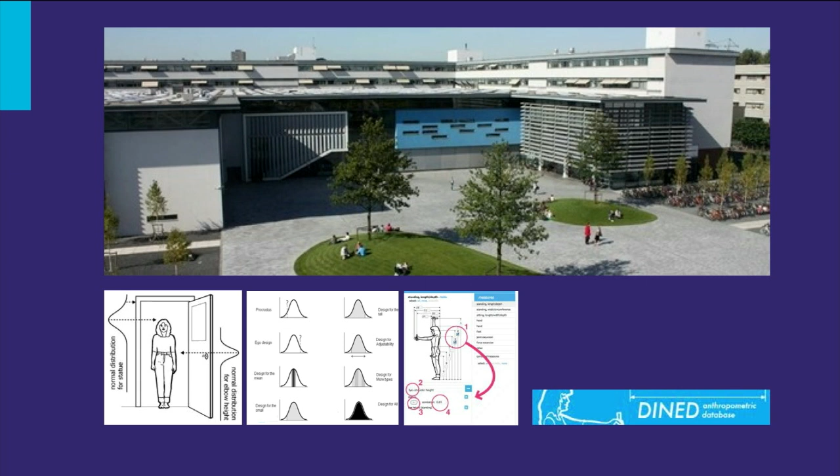To design this cockpit, the students deployed their knowledge of ergonomics, taught in the ergonomics course of the Faculty of Industrial Design Engineering in TU Delft. If you want to design an optimally comfortable cockpit for the driver, there is a lot you can look at. Most importantly, the driver needs to fit inside the car, so the dimensions of the cockpit must match the driver. In this movie, we focus on the cockpit dimensions. How do you design a well-dimensioned cockpit?

Like all good design projects, the 2012 DUT racing team started with an analysis of the situation. They looked at what the driver does, which parts of the car are involved in these actions, and what boundary conditions need to be taken into account. Because they are developing a next generation car, they asked the previous drivers for their experiences with the cars and for their recommendations for improvement.

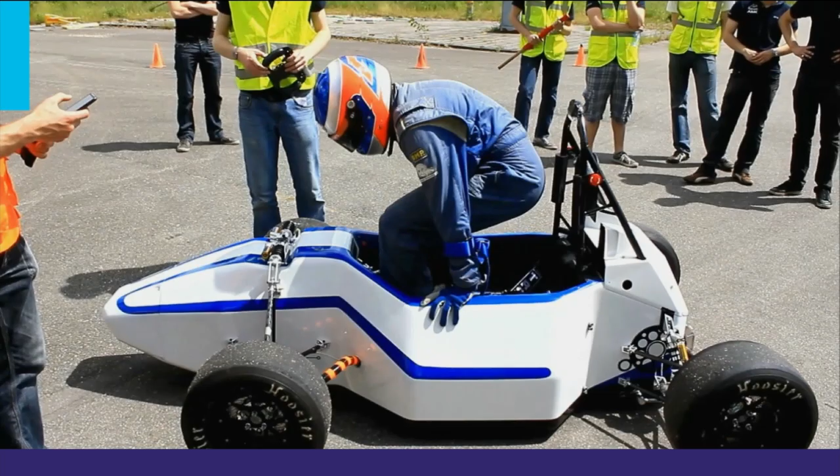Let's take a closer look at the actions of the driver. First of all, he has to get inside the car, and at some point, he has to get out of the car. So the entrance of the cockpit needs to be wide enough to allow the driver to get in and out of the car easily.

Once in the car, he has to drive, which means he has to sit in the seat with his feet on the pedals and his knees underneath the front hoop, his hands on the steering wheel, and his head underneath the main hoop and against the head restraint. The driver needs enough space to turn the steering wheel and to see clearly where he is going.

The DUT racing car is designed for the design competition Formula Student. This competition has a lot of requirements for the car. The important requirements for the design of the cockpit are: a P95 driver should fit inside the cockpit.

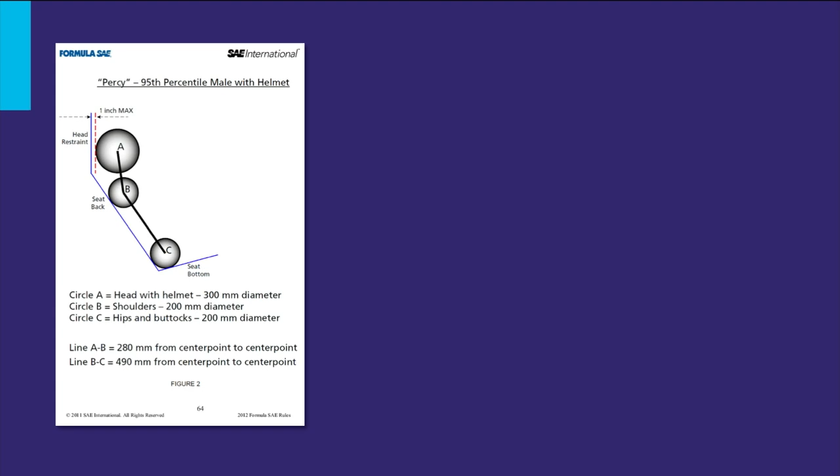There are lines between the main hoop and the cockpit that show the required clearance. There are templates for several parts of the car that show the minimum required clearance. When put together in a 3D picture, this shows the minimum required space inside the cockpit.

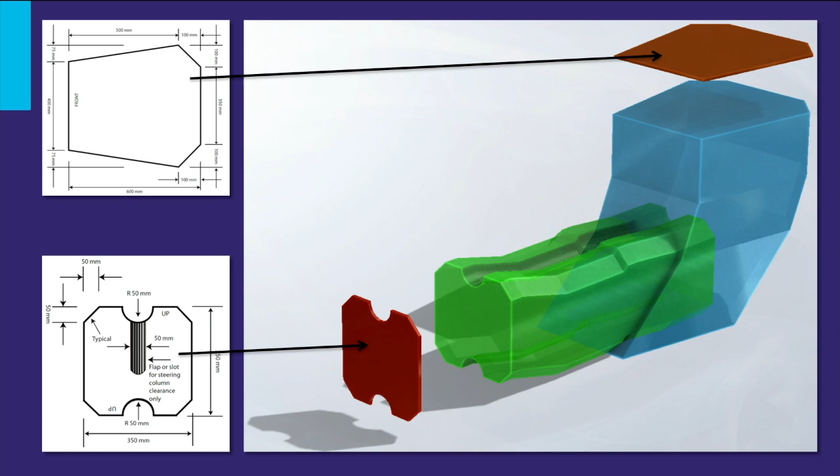For safety reasons, the driver should be able to get out of the cockpit of the car within 5 seconds. Not only must the entrance of the cockpit be large enough, but also the space underneath the front hoop should allow the driver to get his legs out fast enough.

It is not only the Formula Student competition that sets boundary conditions. The team may well develop some additional requirements. The 2012 team decided that they wanted to keep the center of gravity as low as possible in order to improve

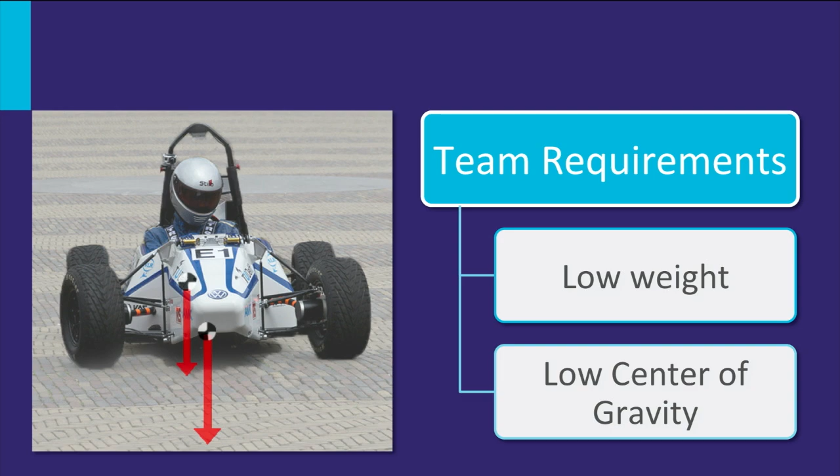the stability of the car. And they decided to fix the position of the pedals, steering wheel, as well as the seat. The drivers of the previous cars are a useful source of information about comfort.

8 of these drivers filled in a questionnaire. It is vital to make sure that all drivers have excellent visibility. Supporting the driver's upper legs, thighs and posterior is important for comfort.

You should be aware that the pivot point of the heel is not where it contacts the ground. The transfer of the dimensions of the mock-up to the digital drawings should be done carefully. And the driver's clothes limit movements, so take this into account when designing the available space.

To summarize the analysis phase: you know that the driver sits in the car and has to be able to reach the pedals and steering wheel. He also needs to be able to see where he is going. You also know what boundary conditions are set by the competition and the team, and you know what drivers would like to see

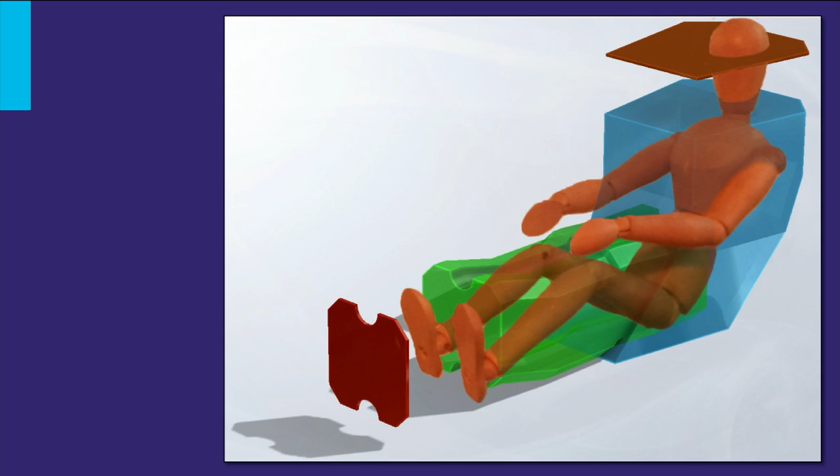improved. The next step in the process is to collect dimensional data from the drivers. From the analysis phase, you know which dimensions of the drivers you need to measure, and that you have to find out more about the comfortable range of motions of the driver's joints.

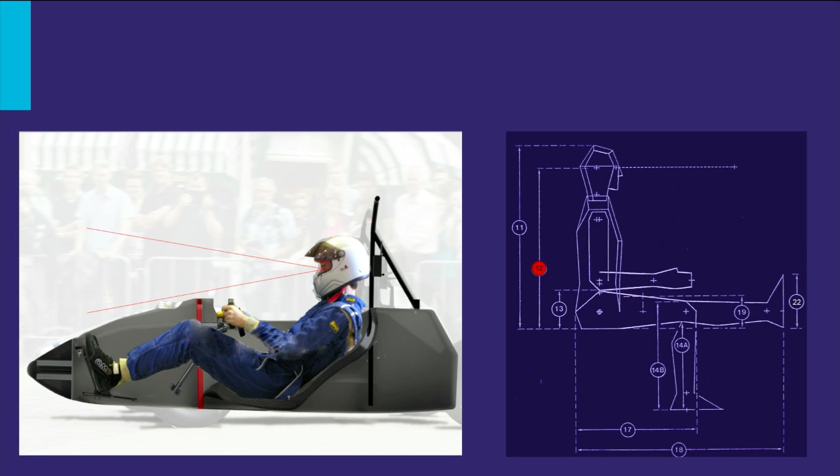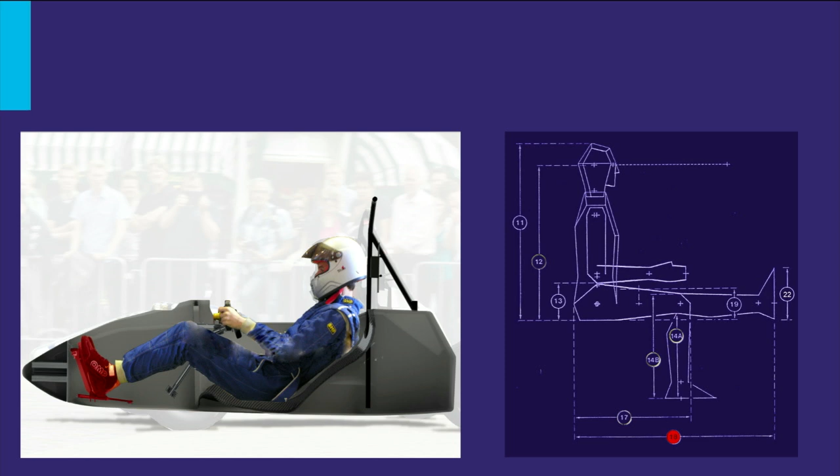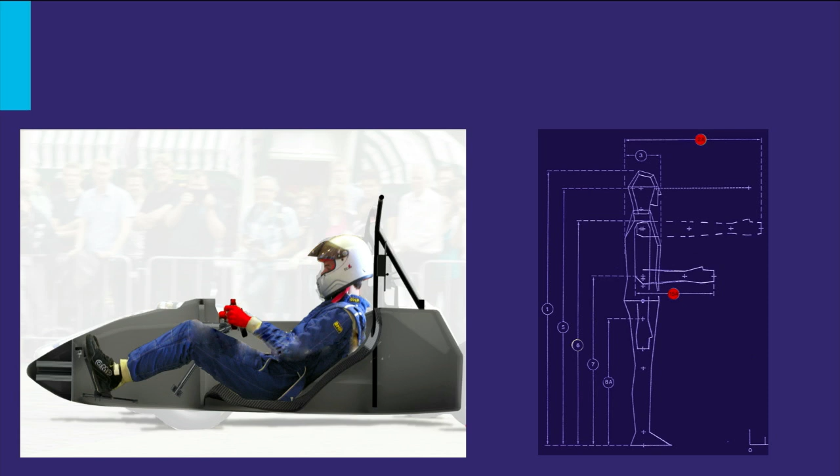The dimensions of the driver that determine the dimensions of the car are: the eye height when seated, for the driver view; the length of the torso for seat height; the length of the legs for the distance between seat and pedals; the length of the upper and lower leg for the clearance needed to get in and out of the car; the length of the arms for the position of the steering wheel; the width of the hips for the width of the seat; and the width of the shoulders and across the elbows for the width of the cockpit.

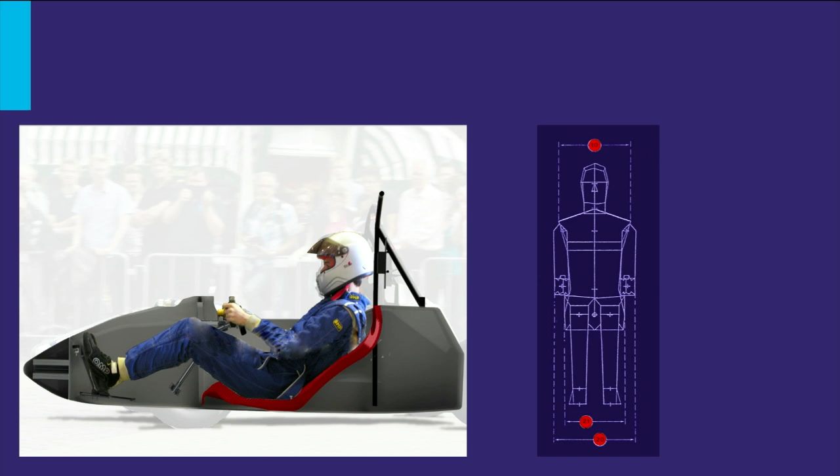So now you've got a list of all dimensions that you need to measure from your team of drivers. But as they will be dressed in their racing clothing, you need to measure them dressed in this outfit.

Now you know what the dimensions of your drivers are, but will a 95th percentile stature driver fit? You may look up the dimensions of this driver in the DINED tables, but you do not know how much extra you need to add because of the racing clothing.

A way to solve this problem is to measure drivers with and without their racing clothing. This gives you an estimation of how much you need to add to the DINED data.

When a driver sits in the car, not only the dimensions of the body are important, but also the posture. This means you will have to look for information about the comfortable ranges of motion of the joints.

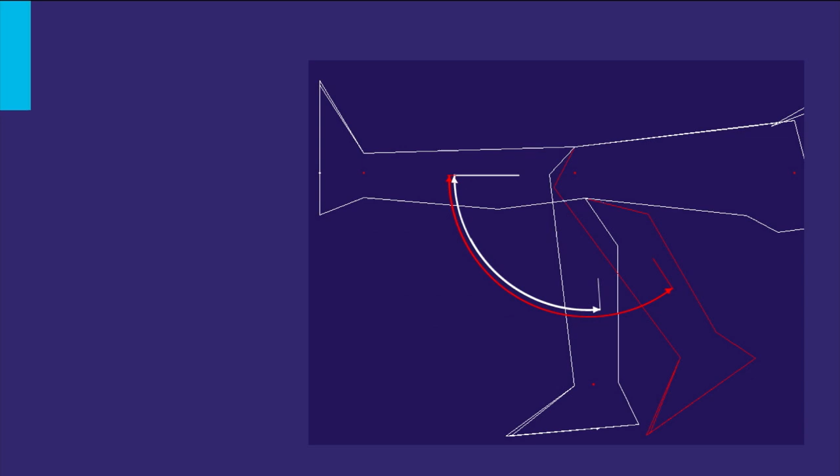For the legs, you need information about the ankle, knee, and hip. For the head, you need to know the comfortable position of the line of sight and the comfortable range of motion of the neck. For the arms, you need to know the comfortable ranges of motion of the shoulder and the elbow.

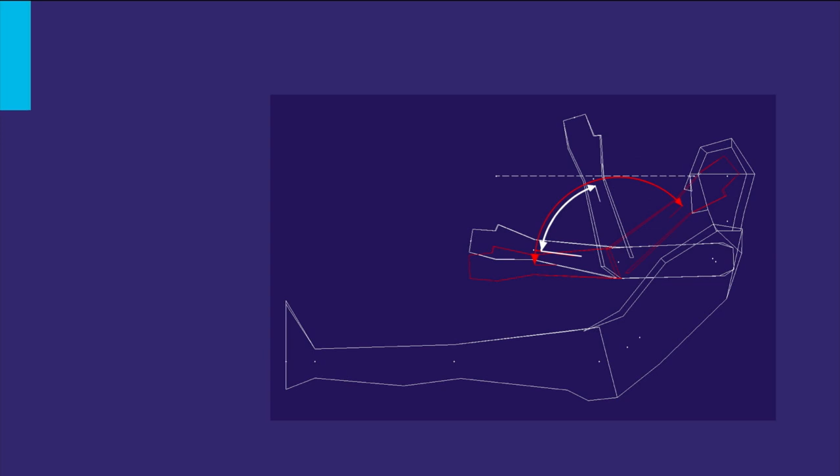After you have gathered the necessary information, it's time to start developing concepts. This is not a linear process, but a cyclical one. Each decision made for the position of a part of the car will influence the position of the other parts. The goal of the concept development process is to find the optimum position and dimensions of all parts of the cockpit. A starting point for the concept phase is the decision that all elements in the cockpit should get a fixed position: one size fits all.

To find out where to put these elements, there are three possible approaches. You could start from a fixed position of the eyes, the so-called eye reference point. You could fix the feet, called the feet reference point. Or you could go for a fixed position of the hip. This hip reference point is what we will use here.

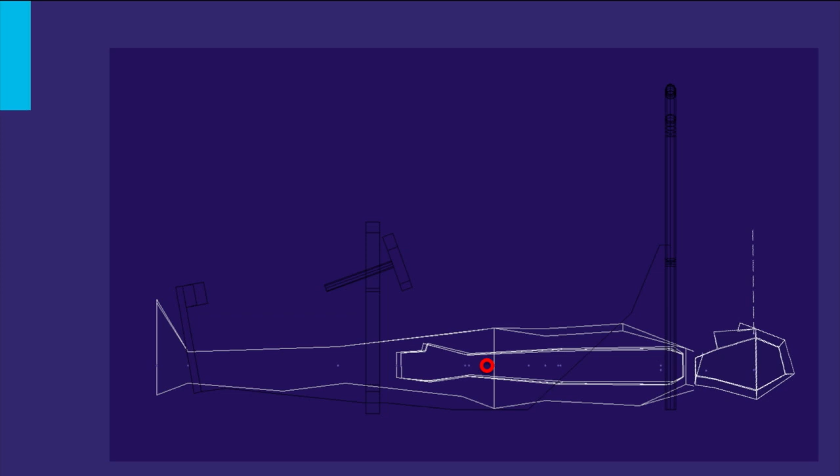The team made the decision that the center of gravity of the driver should be as low as possible. The ideal position would be lying down, stretched out in the car. It will be clear that it is impossible to drive the car in this position.

So the first step is to decide how far the torso needs to be rotated to get the eyes into a position so that the smallest driver will be able to see the road. When he can see the road, the tallest driver will be fine. This position of the driver gives you the lowest possible position of the top of the front hoop.

The next step is to decide where you want to position the pedals. These should be within reach of the smallest driver.

When you position the pedals at the extreme reach of the smallest driver, what does this mean for the position of the tallest driver? Does he still fit underneath the front hoop? And what about the position of the feet? What ankle angles are required to press the pedals in this leg position? Do you need to adjust the angle of the pedals? It will take several cycles to get at the optimum position of the pedals.

After you've made a decision about the position of the pedals, you need to check the position of the torso. You need to look at the position of the front hoop. Is the lowest position of the hoop still possible, or do the drivers need more space underneath this hoop, and did the hoop get higher?

Now that you've decided the angle of the backrest and the position of the pedals, it is time to look at the steering wheel. The driver uses his arms to steer the car. This is more complicated than the torso and the legs because the arms are moving.

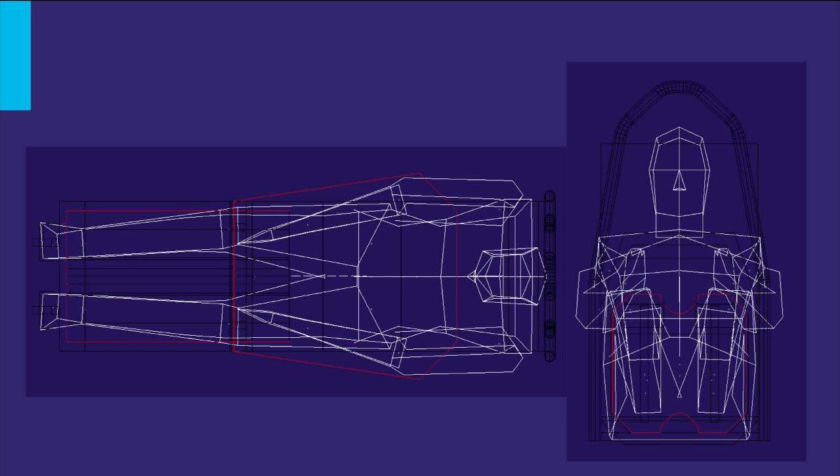When you have done that, you have to check the position of the torso and the legs again. Do you have the optimum combination for the position of the driver, or do you need to make further adjustments? You might need to go through this cycle several times. In the end, the result is a decision for the position of the seat, the pedals, and the steering wheel.

So far, you have designed the cockpit based on literature and human models. This will take you a long way, but you are missing something: what does it feel like?

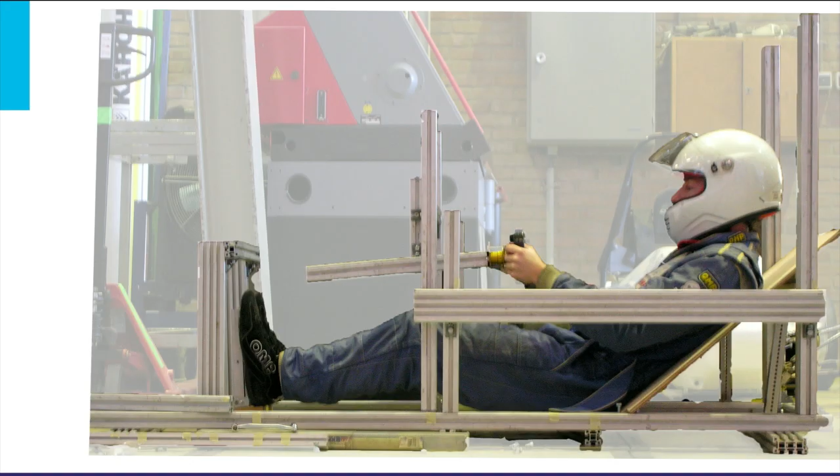To get an answer to this question, you need to build a life-size mock-up to test the design with drivers. They will give you the feedback you need to make the final adjustments before you actually start building the car. The mock-up also helps to explain to the cockpit engineers that you really need that much space or a particular position of the elements in the cockpit.

At the end of all the discussions and the decision making, you get to building the real thing. So just go for it.